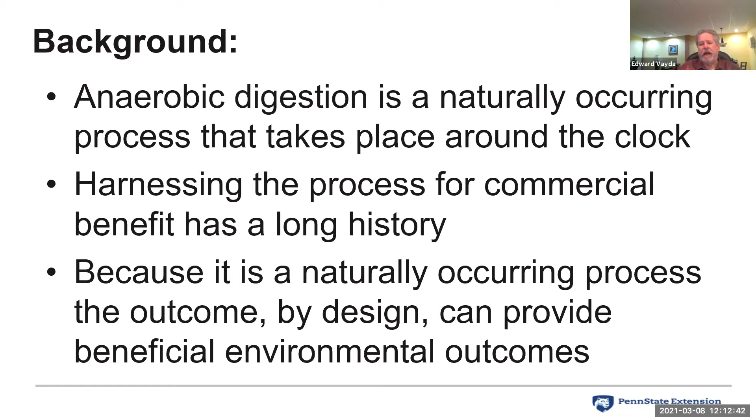So we utilize anaerobic digestion as a means of curing an issue, resolving a problem, or improving the environment. With that process, we also end up with some other benefits, some co-products, perhaps, that help to pay for the project, help to make the economics work. And economics, when we're talking about sustainability, is very important.

And I want to just take a minute and touch on the use of the term sustainability. As we move on in the 21st century here, we use this term in many different topics.

Excuse me, grab a little swig here.

But sustainability must make economic sense. A process to be considered sustainable has to make economic sense. It also has to benefit the environment. And it also has to have a benefit for the community in which the process is located. So in the long and the short of it, we're looking for good things. Anytime we design a process that we consider to be sustainable, we're looking for 3 legs of the stool in order to meet that test.

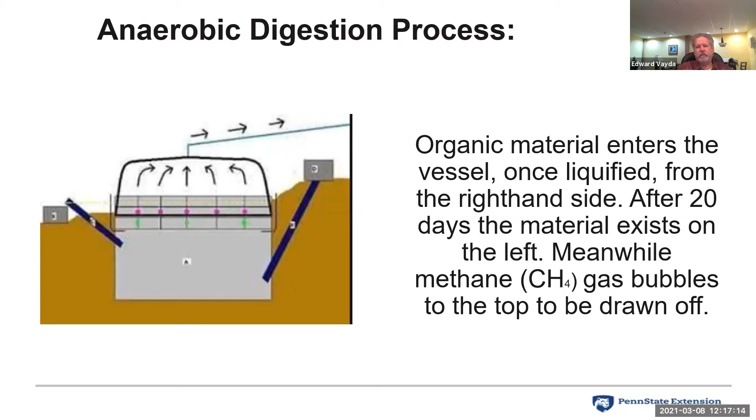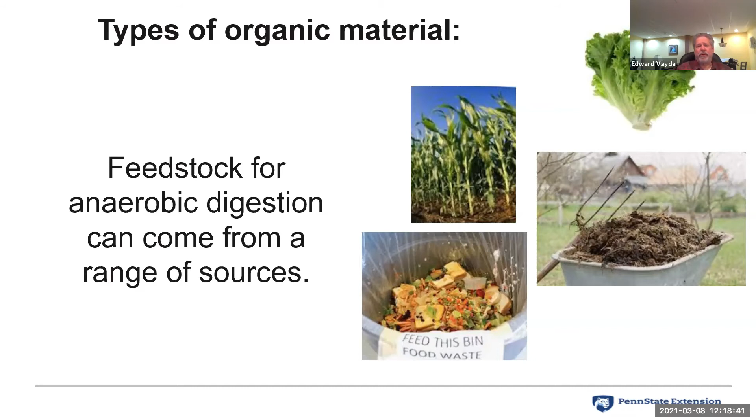And I want you to think about that as we go through the discussion, where there's different sources of organic material that go to waste or sit on the roadside, like wood chips or something like that, just composting, which isn't a bad thing, but it doesn't produce any of the co-products that we're going to be speaking about.

But the other important thing about our anaerobic digestion process is maintaining optimum operating conditions. So for a typical anaerobic digester, the range of operating temperature is between 90 and 100 degrees Fahrenheit. And it's very important to keep a healthy colony of microbes, that you keep them happy, keep them growing, keep them reproducing, that we maintain a temperature ideally at about 95 degrees Fahrenheit.

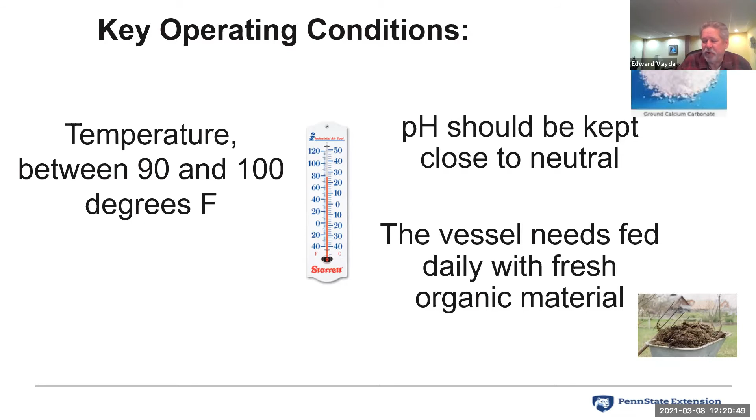And the other thing that needs to be done on a daily basis is we have to feed our digester. We have to give it a fresh supply of new organic material on a daily basis to keep it up and running, keep all those microbes happy. Because a healthy colony of microbes is what's going to do all the work for us. And remember, these guys are living in there without oxygen. So keeping them happy by maintaining a proper balance of pH and temperature is critical to maintaining the health of the digester.

And if you were involved in the operation of a digester, you become in tune with what's going in, the pH, the temperature of the system, and the production of natural gas, the production of biogas, and how important that balance is to maintain, to see by observing how the digester was performing by the amount of methane gas that's being produced. So there's definitely an opportunity to get in tune with nature if you would become involved with operating an anaerobic digester.

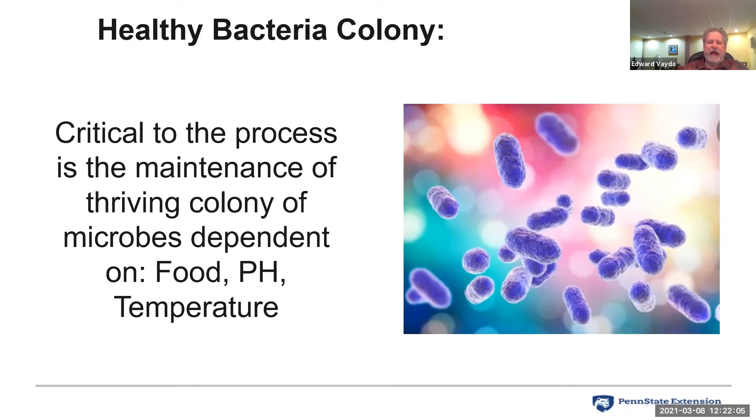So digesters can come in many shapes and configurations, and they need to be sized appropriately for the use that they're intended. So if we were, for example, at a food processing plant where we were making potato chips, and we had an awful lot of potato peels coming out of that process, and other waste, cooking oil, for example, and we needed to process that material, we would know the volumes that we're dealing with because of the size of the plant that we built, and we would size a biodigester to handle the amount of organic material that was going to enter into our biodigester, and we would design accordingly.

So in our picture here, we're looking at what's referred to as a continuous stirred tank side mix digester, and you see the components that I've mentioned here. We've got a method of injecting organic material from the left. We've got a heating system in the tank itself that's enabling us to maintain that 95 degree Fahrenheit temperature. We also, in this example, have a mixing device that allows us to keep the biodigester in some form of agitation, so we have the microbes well distributed through the material that's inside that digester.

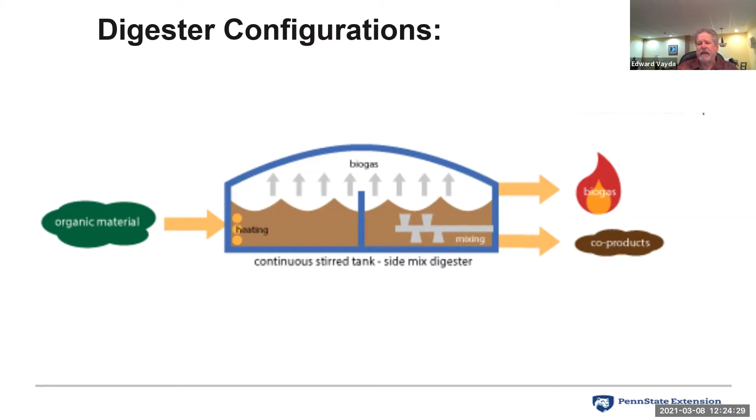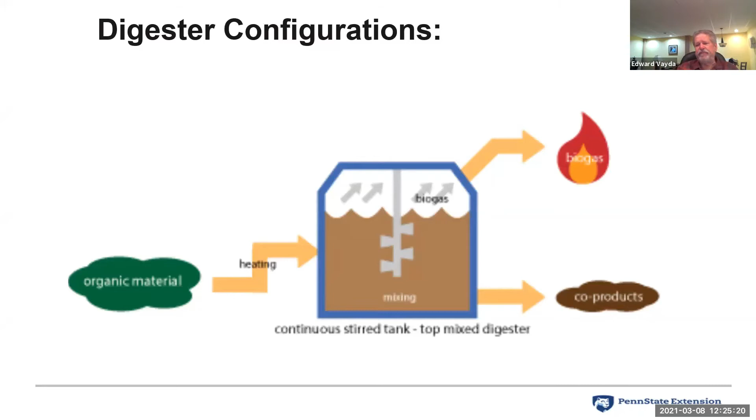Here's another digester configuration with a top-down mixing device. In this example, we're heating the feedstock before it enters the digester, and we're extracting the biogas and the co-products out the side after the minimum time in containment, which is about 20 days. So we want to design our system so that the organic material has a residence time in the digestive process of about 20 days. After that, as I said, it's been reduced down to plant fiber.

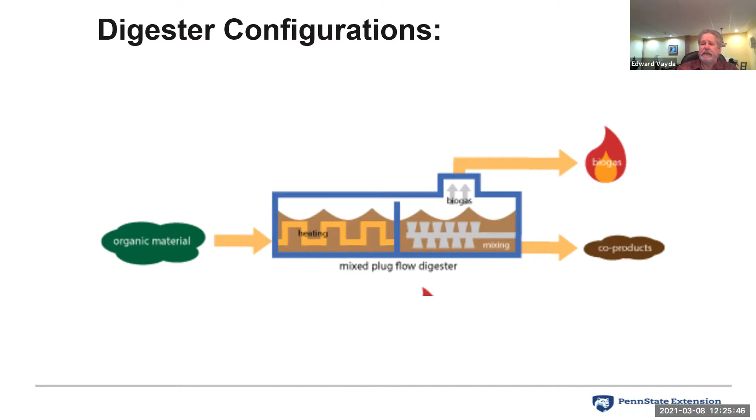And then the final, probably the most simple form, is just a plug flow digester where we're keeping the content of the digester at the right temperature. We're measuring, of course, pH coming out the co-product side, and we adjust the feedstock entering on the left-hand side there to make sure we keep our pH properly adjusted and we've got the right temperature and our microbes are happy and biogas is in ample production.

So that's a quick overview of what typical digester configurations can look like, but of course they're not limited to that. All of these examples were continuous flow digesters. It's not uncommon for there to be a batch flow design, but if we're moving volumes of material, as we would be in the potato chip factory example, or in the case of dairy farms, which we're going to look at on the next slide, we need a continuous flow process in order to manage the feedstock flow, and also to keep that biogas production, because all of them contribute to the sustainable success of the entire process.

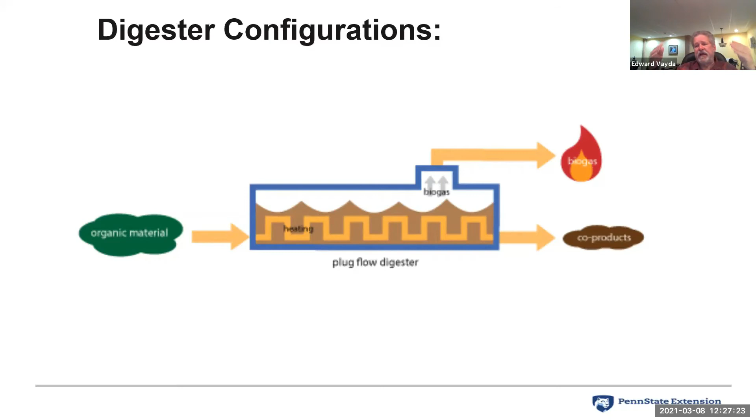So this is an Indiana County example for our residents of Indiana County. This is on a dairy farm in the county. This is a system that was designed to handle the flow of feedstock from about 500 cows. This system produces enough methane to run the digester, and by that I mean keep it at temperature, and we'll talk about how we do that, and also to run a generator, in this case a 90 kW generator that produces electricity. And that electricity is used under the net metering rules that exist in Pennsylvania.

Although this particular location is served by a co-op where they've adopted similar rules, and they are allowed to feed electrical generation to the grid, as well as offset their purchases from the grid to minimize their electrical costs for their operation. The entire system's been up and running for about 15 years. So you can see it's got some longevity. It doesn't run for 2 years, break, and sit on the shelf.

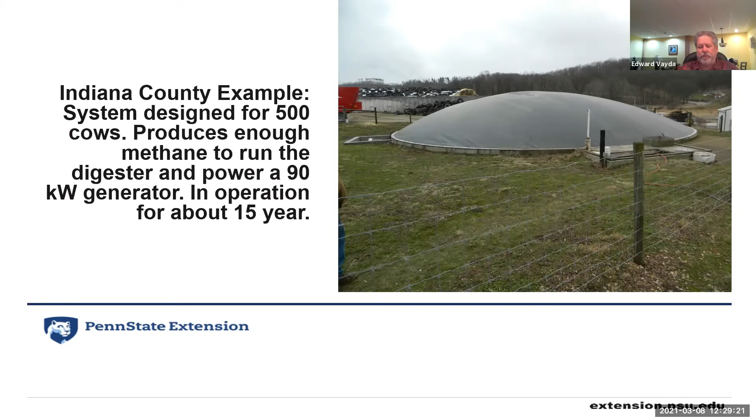But what we see in the background here is the top of the digester, which in this case has a flexible membrane that's held up by the pressure of the methane gas in the digester. And we're going to look at how we get material into the digester and how we get biogas out of the digester and to the generator. But the whole process, of course, starts off with our feedstock suppliers. And in this case, it's a dairy herd.

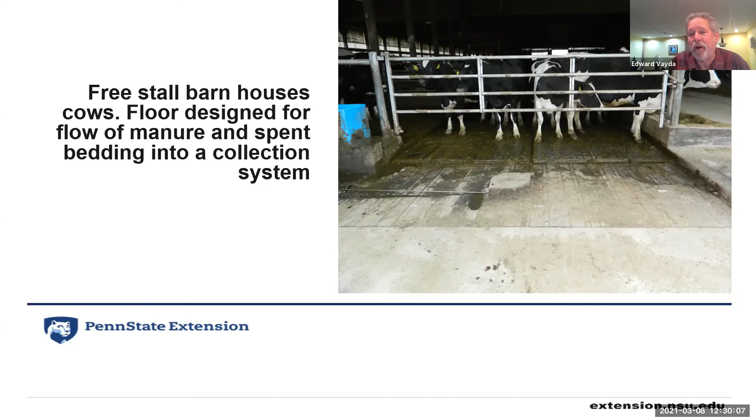And you can see some cows standing there in a freestall barn on a special floor. And this floor is designed to make the collection of manure and other wastes from the cows easy, as well as the spent bedding that the cows are provided to keep themselves comfortable through the day. And that floor is very important because it makes cleaning out the barn as easy as possible, but it also directs the material into a lagoon at the end of the structure. And what we're looking down into here is the outlet end of the barn that slopes into this lagoon structure.

And at the end of the lagoon there, right in front of the green piece of equipment, is a pump. And that pump is run by electricity, and it's on a timer. All of this kind of works like clockwork, because if you have X number of cows inside the barn, and they're consuming water and feed, it's pretty predictable how much outflow is going to be accumulating in the lagoon. So this pump operates on a timer, and when it kicks on, it pumps the manure from the dairy herd through the green pipe exiting out of the top there and up to the digester vessel that we just looked at with the flexible membrane top on it.

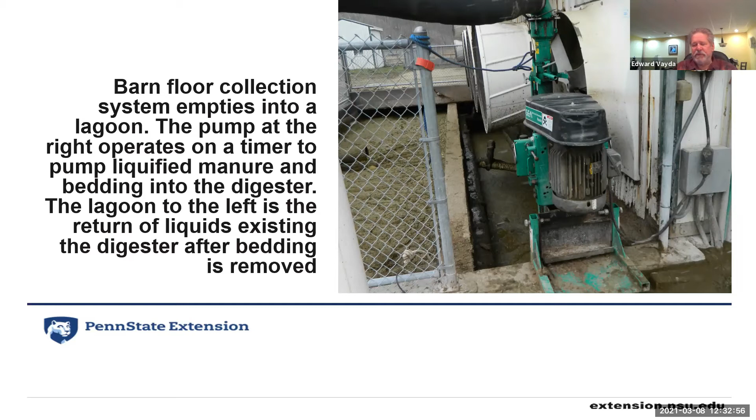So up there next to the vessel itself, coming out of the dome section of the digester vessel, is the natural gas supply. And these pipes are how that gas gets transferred over to the generator building.

But one of the things that the system has to take into consideration is the removal of moisture from that biogas stream, because it's in a very wet environment, and as the biogas bubbles out of the content of the vessel, it's full of moisture. So this example here, the elbow that we see in the bucket shaped vessel here, is where the water coming out of the biogas gets managed. So the atmospheric pressure and the water in that container is what maintains pressure on the natural gas inside the pipe.

I also want to do a brief advertisement for how beneficial PVC piping is. Without PVC piping, doing projects like this would be much more difficult. But as it is, you have the advantage of being able to put parts together, and there's a rubber connector there in the upper left-hand corner that allows the operators to take this system apart and clean it out periodically. Without the ease of operating with PVC pipe, this would be a much more difficult installation.

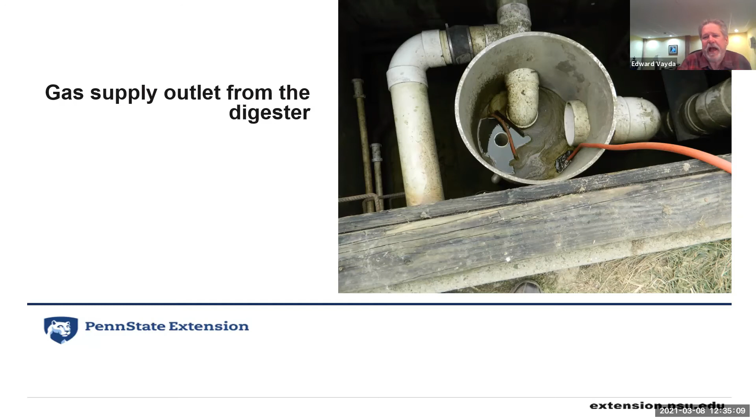So anyways, here's our natural gas pipeline coming out of the biodigester. And on the other side, just adjacent to this, is the effluent exit. So as the pump that we saw from the freestall barn is pumping manure up into the one side of the digester, just to the left of this, the material flows in circular fashion throughout the round digester vessel, and having spent approximately 20 days in the vessel, this is what the material looks like coming out. And it's all at the same elevation, the same height, because it's acting as a fluid in this structure.

And this is just a set of paddles that kind of push a small amount of the spent effluent out of the vessel each time that these little paddles spin. And the pipe is connected to that, where the plant fiber will be extracted before it returns down to the lagoon that we talked about, once again at the end of that freestall barn. So this is the exiting effluent from the digester after its retention time.

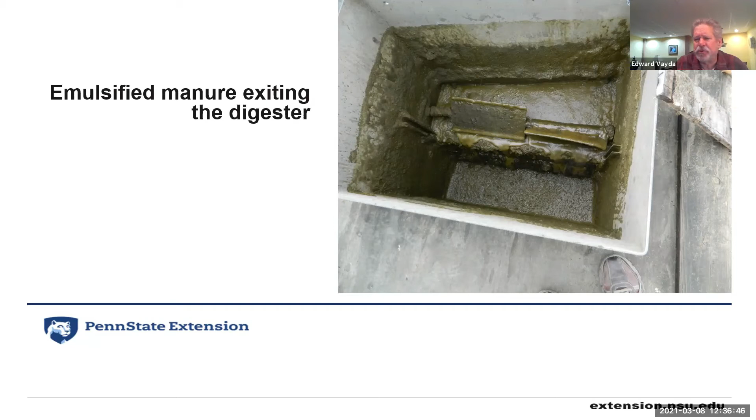But let's take a closer look at this. You might find this very interesting. Here we are looking over the top of one of those paddles, and you can actually see the bubbles in the content leaving the vessel, still full of methane gas that's exiting the digester. So you can get an idea of just how much gas, and this is at the end of the line when gas production would be minimal. But you can see there's a lot of bubbles there coming out of that liquefied manure material that's now exiting the digester.

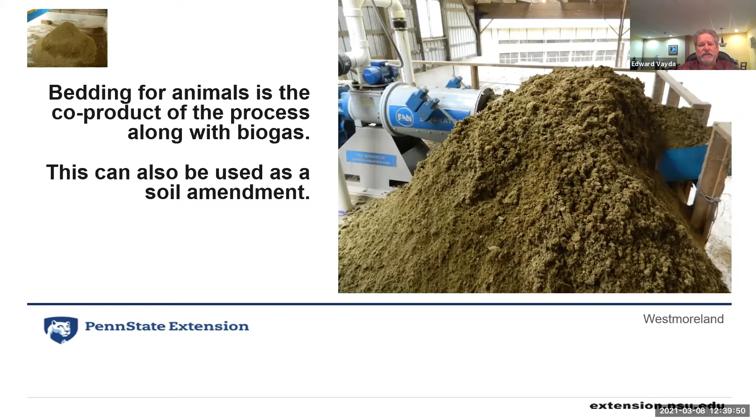But in the example that we're looking at here, there's still a need to have a flare where excess natural gas is flared off in order to protect the membrane on the dome from excess pressure. So if you just let this thing run on its own, there's an opportunity to create a higher pressure than the membrane is designed to hold.

In order to safeguard that, there is a flare mechanism that burns off the natural gas before it is allowed to escape into the atmosphere, where it's a pretty excessive greenhouse gas in its intensity. So the system is designed to prevent the release of that gas and convert it by burning it before that biogas escapes.

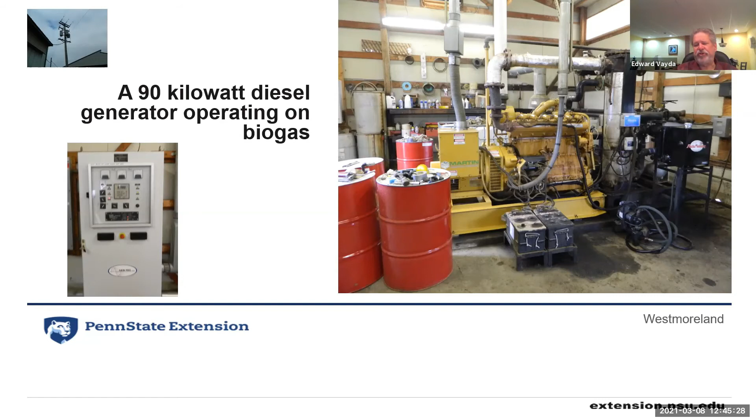Operating 365 days a year and maintaining a temperature of 95 degrees Fahrenheit takes a lot of heat. If we go back to our generator here, we see that the plumbing exiting the building on the back is actually the coolant system that keeps the engine genset at the right temperature. That heat is dumped into the anaerobic vessel, maintaining temperature there. If that temperature gets too high, there's also a radiator type device outside that dumps heat into the atmosphere. So the entire temperature of the system is maintained by the excess heat from the genset.

A very important part of it then is to keep that genset running. If you're not doing that, you will need to operate a boiler with the biogas if you have the genset down for an extended maintenance period, in order to maintain temperature in the anaerobic digester.

So basic economics of the generator. I just picked 100 kW as a size, and if it operates 80% of the time during a normal year, that would be 100 kW times 0.8 times 8,760 hours a year. And just picking a number for the price of avoided electricity or the credit you would get from the local electric distribution company, you see there's about a $70,000 benefit to operating that system.

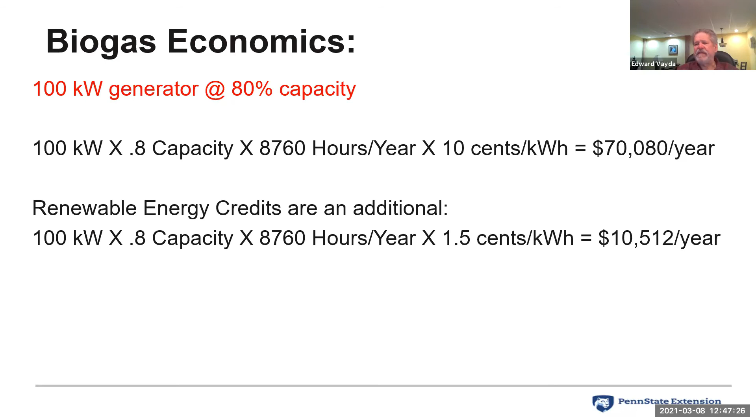Because this is a renewable energy operation, the feedstock here is grasses run through a cow's stomach, it qualifies for renewable energy credits. That every year would produce another $10,000 to the positive side of this operation. So just real simple, back of the envelope numbers, this operation at 100 kW should produce somewhere around $80,000 worth of positive cash flow.

Just to recap the whole picture that we've just looked at there, we can find our organic source of feedstock from many sources, even municipal waste from wastewater treatment plants, but animal manures, wastewater, biosolids, food waste like we discussed from cafeterias or food that has gone past its useful date in a grocery store. Even canned goods can be dumped out of their cans and run through a process like this,

as well as other organics like fats and oils, so fryer oils, grease from other food processing operations, in addition to crop residue. As I showed in one of the early slides there, corn stalks properly chopped up and liquefied can run through a process like this.

And we see the outputs of this system are our biogas opportunities, which can produce electricity, can produce heat, and also be used as vehicle fuels and injected into the local distribution network as renewable natural gas. So it can be used to heat homes or businesses or process gas in industry. We can also produce bioplastics from some of the fiber materials that exit the digestion process.

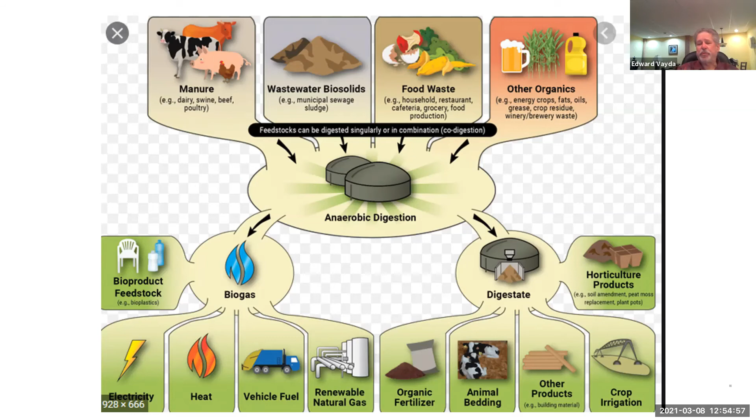It's actually referred to as a grass to gas process, where we're encouraging the development of bioenergy crops in addition to conventional sources like manure, where we treat the biodigester itself as the cow's stomach and let the digestion of grasses take place in the anaerobic digester vessel and produce natural gas for use in the things that we described on this slide here: electricity, heat, transportation fuels, and renewable natural gas.